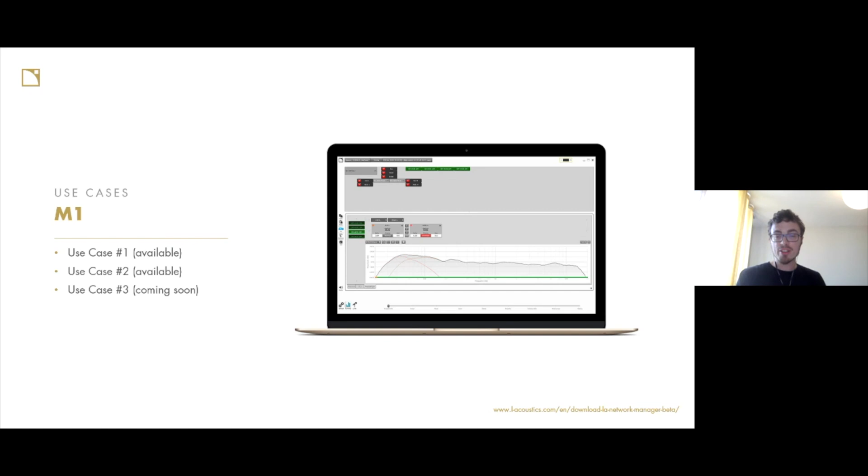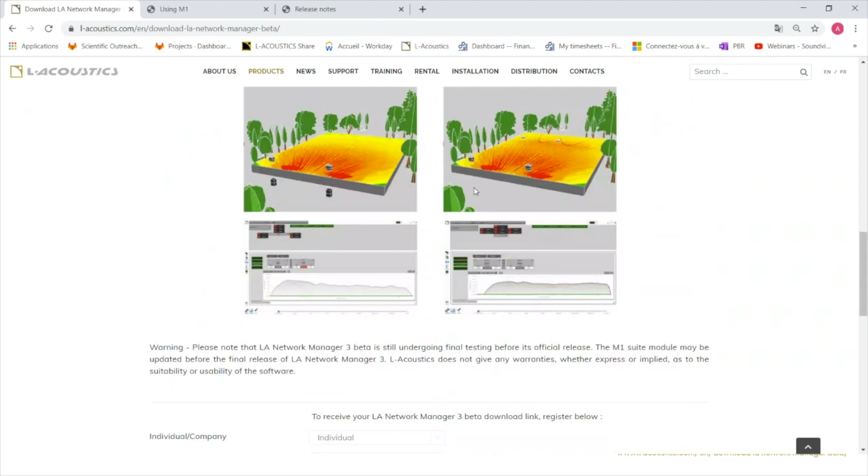Right now, normally you have access to the beta version that you can easily download on our website. Just going on Products, Software, and clicking here on Network Manager, you have a short presentation of the M1 suite with use cases 1 and 2 available in the package for Windows and for Mac also. You just have to register here, and you should receive a download link with Network Manager 3.0. This beta version uses firmware 2.9, like the official 2.7. It just includes the M1 suite, I mean M1 in the tuning page and RTA in the live page.

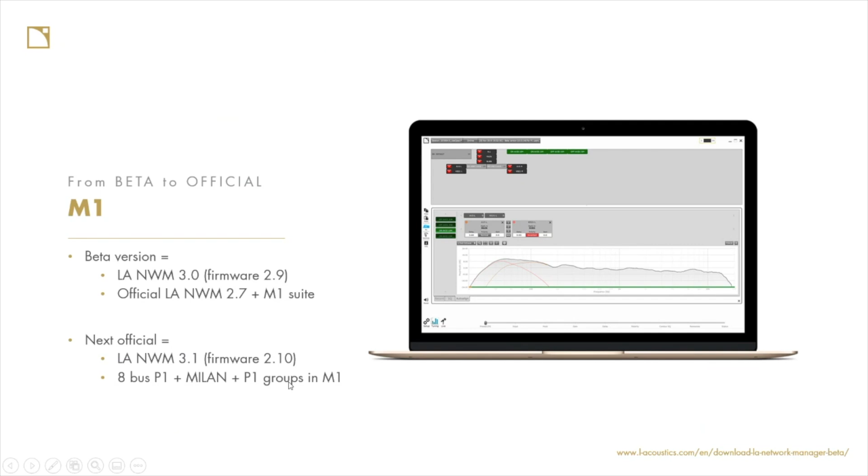Coming soon, the next official release will be LA Network Manager 3.1, including firmware 2.10, with a lot of new features, including in particular 8 buses for the P1 instead of 4 currently, with the new Milan specification inside, especially with AVB redundancy, and with a new feature regarding M1, which is related to P1 group management.

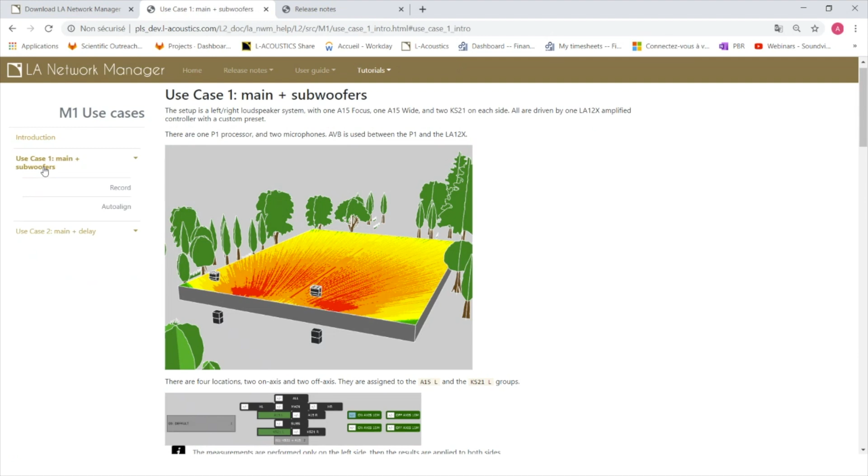So as I've shown you, you can already download the beta version. You can, of course, use the embedded help, where you can find here on the M1 use cases the description of each use case, with the presentation of the setup. For instance, this first use case 1 is main and sub using KS21 and A15.

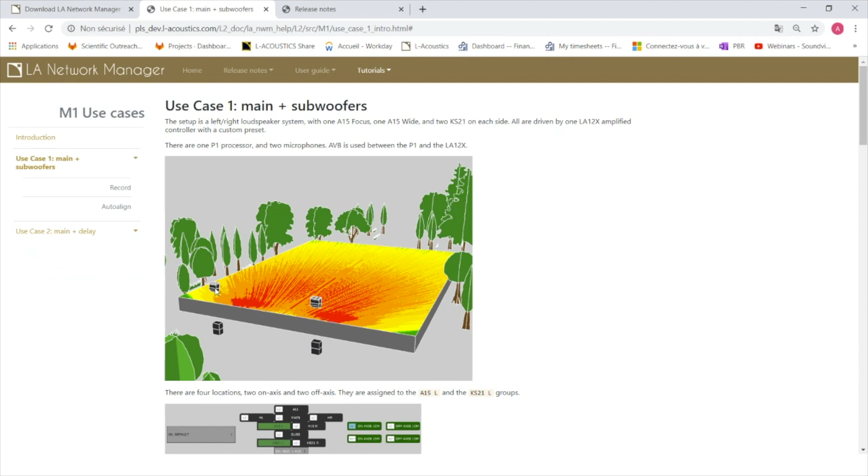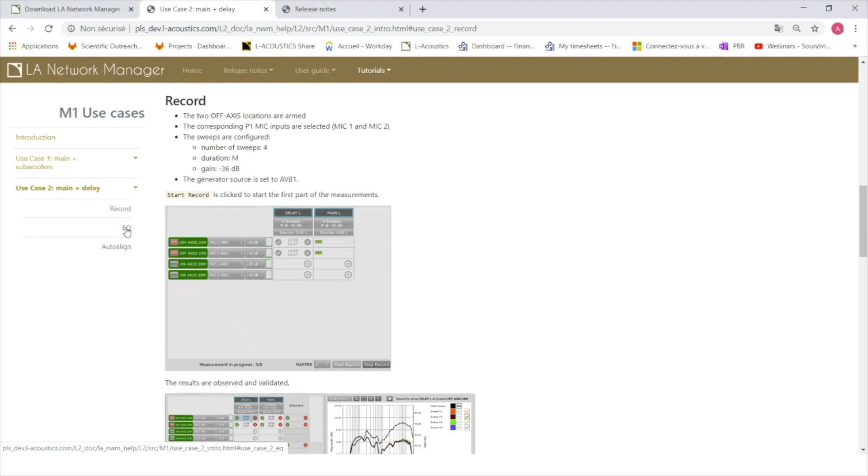It's introducing how the measurement included in this use case was recorded and how to use auto align. Same with the second use case related to the tuning of an A15 main and A15 delay, how the measurement was recorded, how to use EQ and auto align.

You can, of course, if you need, and you will probably need in the tuning page, access the embedded help regarding M1 workflow: how to set up, how to record, EQ, auto align, and last but not least, recommendations about the starting point of the measurement setup and how to review measurement and improve its quality if needed.

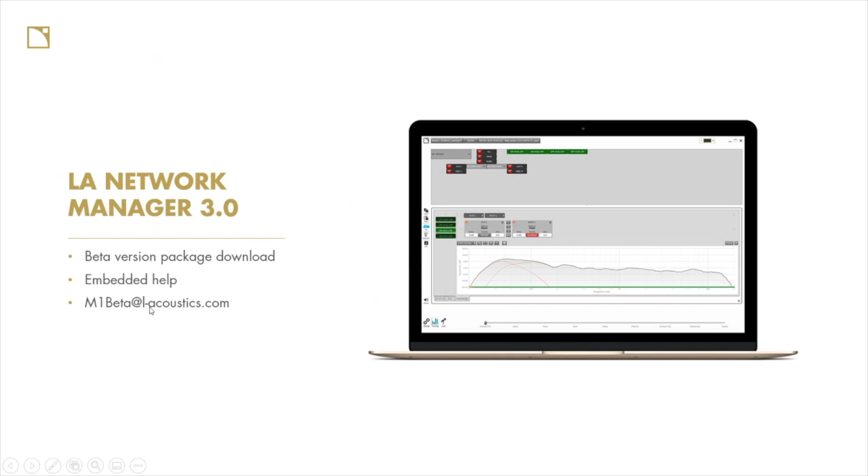So I think we are ready for the demo of the new 3.1 Network Manager version. To do this, I will first start with a simple setup with only one P1.

As I told you, the new feature in this 3.1 session version is that we can directly measure P1 groups, for instance to measure P series, or just to measure third party in combination with an L-Acoustics system. So you just have to create a group. Let's call it bus guest.

I can assign it directly to the 8 P1 buses. Let's say that I want to use bus 1 and 2 for AVB driving my main and sub, for instance, and I would like to use a bus dedicated for my P series. So I can just assign this group to bus 3, for instance.

So bus 3 for analog output directly feeding my fills, and bus 1 and 2 for AVB for my main and sub. As Scott showed you yesterday, you can add a location to measure a group, and now with this new version of Network Manager, you can assign directly a group, a P1 group.

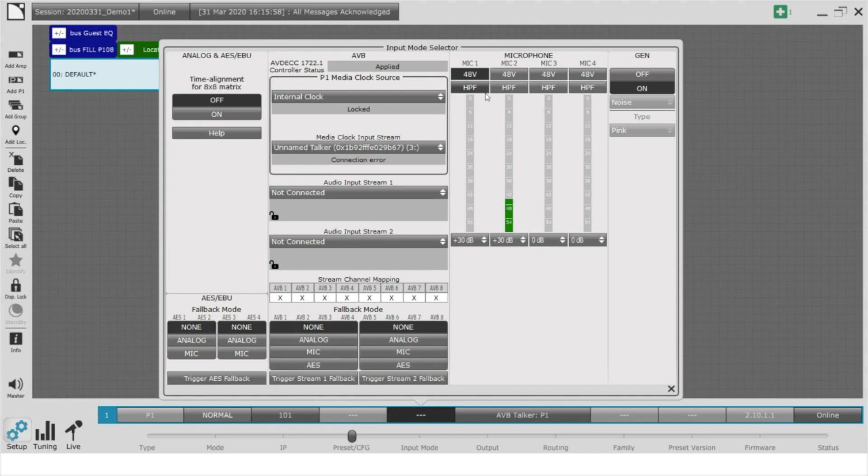That means now I am ready for a measurement. Just checking that I already have my mic ready for the preamp gain. I will just use one mic, with preamp gain and 48 volt power supply on.

And normally I can go into tuning and open MI. I will directly arrive on the record tab. Of course, I cannot go into EQ or auto align because I have not yet performed any measurement. So to do that, I will just have to set my sweep settings.

By default, you have 4 sweeps with M duration, medium duration, and a sweep gain at minus 48 dB, which is a safety approach, of course. But I advise you to check our recommendations regarding sweep settings and measurement quality and how to get it. There will be some white papers on it coming soon, and especially a webinar on Friday with Etienne and his team about how to get good quality measurements.

So for the moment, I will just leave it like this, and I have to route my generator. For this field bus, I just have to assign my generator on bus 3. Here you have a message saying there's no group armed, so I just have to arm my location, and now I'm ready.

On location 1, I will use mic one, and you get direct access to the preamp gain if you need to change it with the VU meter. Beware that the VU meter is pre-mute, so before starting recording, you have to unmute your mic. So normally we are ready to start.

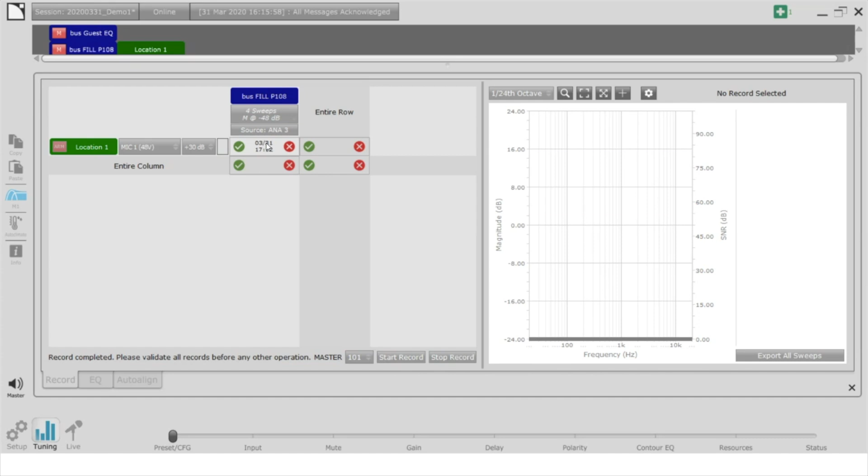Okay, once the measurement sequence is complete, by clicking on the measurement you have access to the SNR, whose Y scale is on the right side, SNR in dB, between 0 and 100 dB. You can see here that we are very good, around 50 dB of SNR, with a quality bar which is green, meaning it's a good, valid measurement.

And you have access here to the magnitude of the sweep. You can easily check the magnitude of the 4 sweeps here, which are almost in the same line, the same black line. The black line represents the computed sweep, which will be used for the rest of the tuning.

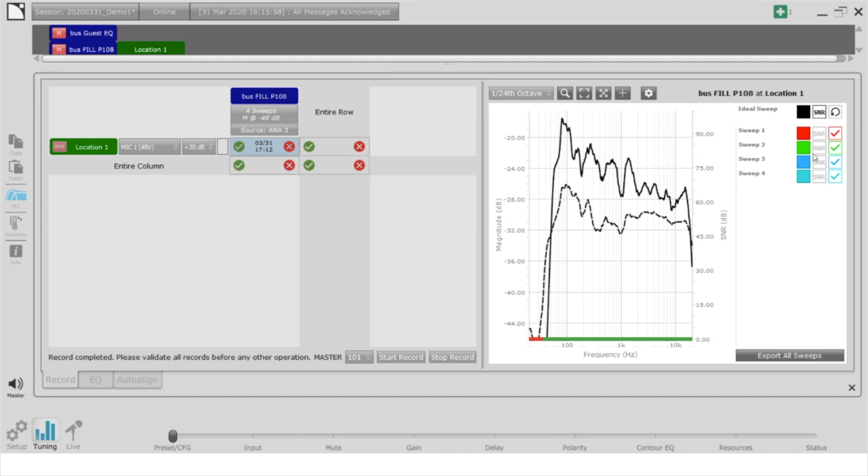And here you can unselect, if needed, one or several measurements. Actually, we have a clever algorithm managing this multi-sweep, which can easily detect SNR too low and discard sweeps with too low SNR, or sweeps with too much disparity regarding the spread of the sweep. So here my 4 sweeps are correct. I can accept it, and if needed, I can check my measurement further.

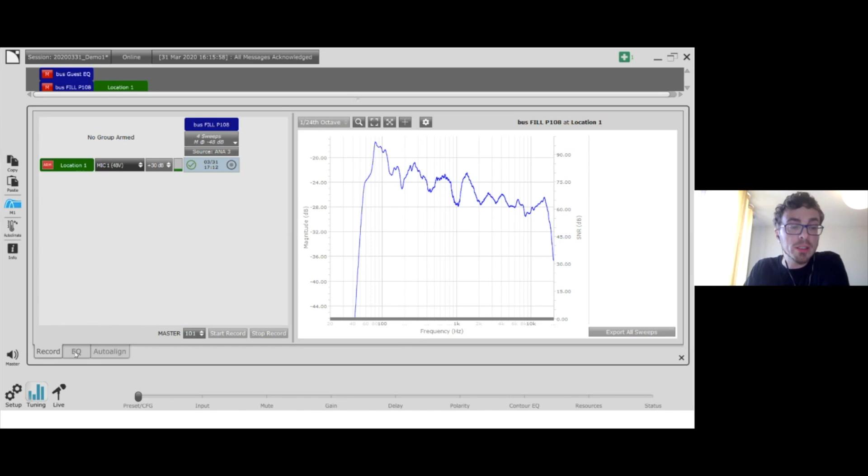As it's now recorded, I will have access to this measurement in the EQ tab, and I will have access to the gain, delay, and EQ of my P1 measurement group, and also to its parent groups, the grandfather groups, bus guest EQ.

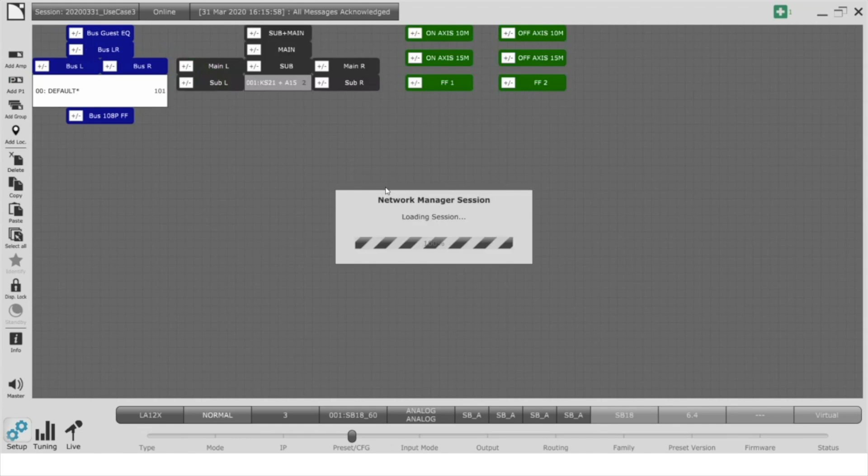As you can see, it's quite easy to measure P1 groups the same way as measuring the amp groups, as shown by Scott yesterday. I will directly go onto the new use case 3, including P1 group and amp group measurement.

Let me get rid of this. So in this use case, a quite simple and traditional system: sub and main, left and right system. I have sub left, sub right, main left, main right. I have double checked the assignment of the parent group sub and the parent group main, including left and right side, and I have a grandfather group sub and main.

This left and right system is driven with AVB through bus 1 and 2, bus left and right, whose parent group is bus left right. I also have a front fill driven by bus 3 with my bus 108P front fill, and the same bus guest EQ, including all the groups and measurement groups of the P1.

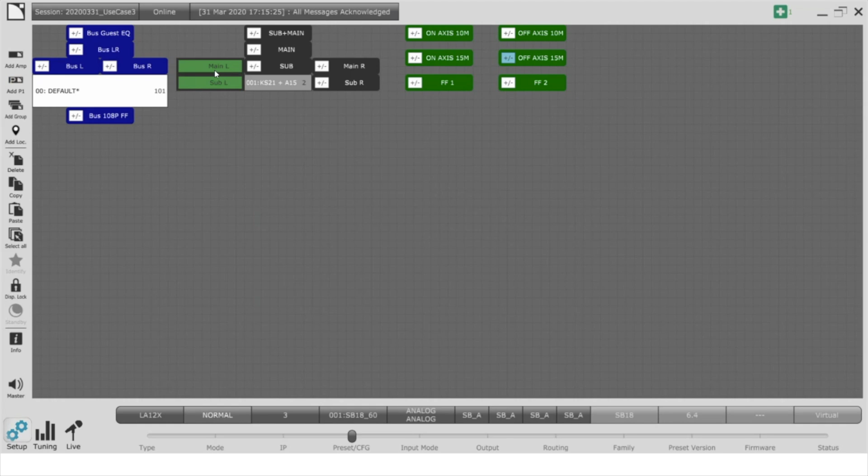As you can see, I already have 6 locations: 2 on axis and 2 off axis to measure main and subs, and 2 front fill dedicated to measure sub, main, and front fill. That means I will use these 4 locations to tune sub and main together, and then once sub and main are time-aligned and EQ is well tuned, I will use these 2 locations to tune front fill with my reference source sub and main.

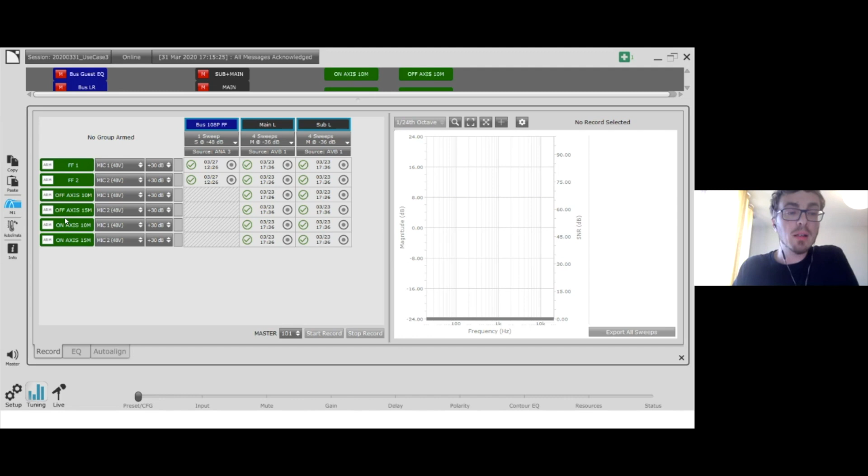So as I explained, this use case already includes all the measurements. That means for the 3 groups, I have measurement on the 6 locations. You can just check that measurements are already present here.

So we can directly go into EQ. In EQ you will find the same organization: the 3 measurement groups here, sub, main, and front fill bus, and the 6 locations. So I have measured sub and main on the 6 locations, and front fill on front fill 1 and 2.

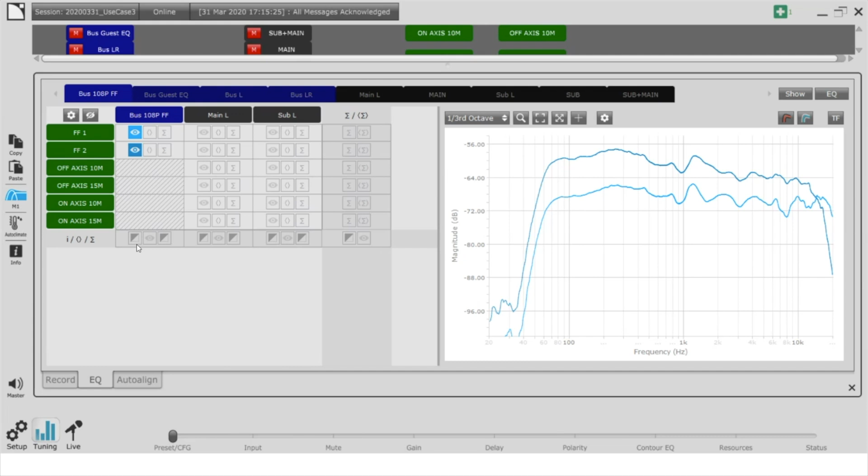I can, of course, display first, for instance, all my main individual measurements, the 6 measurements at once, or just one by one, and of course the average. The same for the sub - I can display all the individual measurements or display the average.

And if I want to display the current summation of it, I can just click here and here. I can maybe zoom on it a little bit.

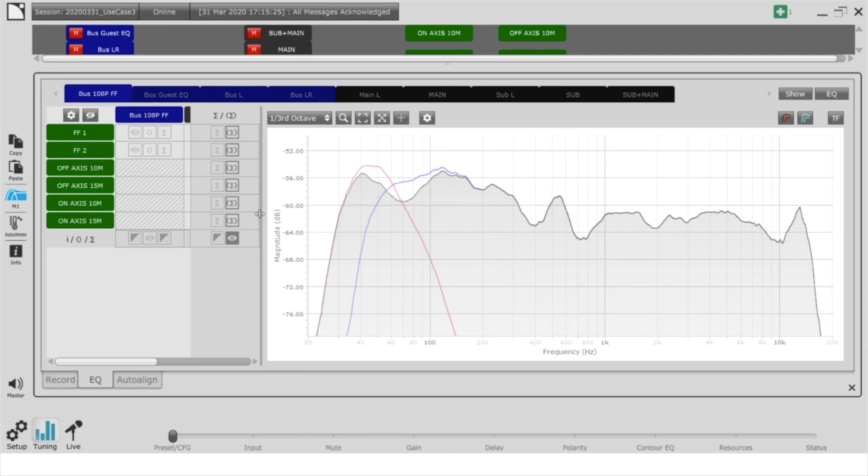I usually choose third octave band to choose the good contour target. I try to align here. I can maybe just adjust here if it's needed or not - oh, sorry for that. Okay, let's say it's good enough.

So as you can see right now, my sub and main are not really in phase. So before making any EQ, let's just go to the auto align tools.

In auto align, you will also find the 6 locations. And for each location, you will see that for the off axis and on axis, you have measurement group sub and main left, and for the front fill, sub, main, and front fill bus.

So let's say I would like to first align sub and main. I will just have to click on it, choose the target group - the group on which gain, delay, and polarity will be applied. So as I have a left-right system, I measure left, but I will apply the delay and the time alignment strategy on the parent group sub. And for the main left, I will choose the main parent group.

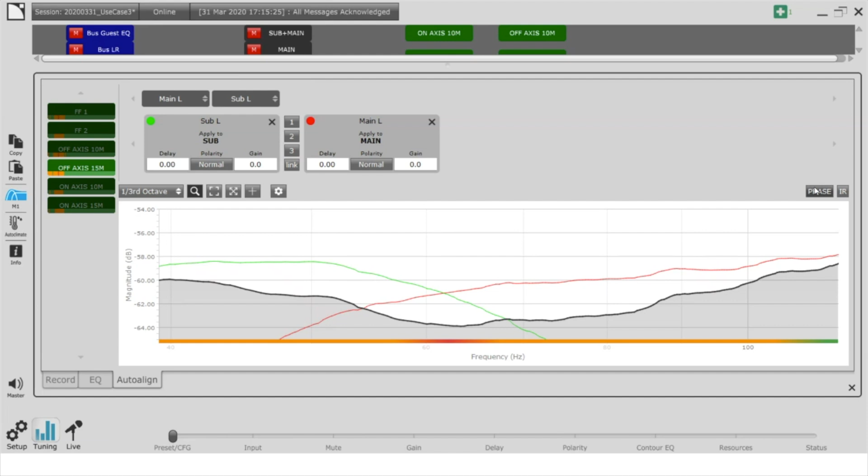So maybe I can choose this one. I can zoom on it in the crossover, and I can also check the phase just by clicking here. So you can see that through the phase, we are completely opposite phase between the two sources currently.

So let's just try to click on the first button, which is option 1 of our algorithm delay finder. So what happened with this solution? It has proposed around 1 millisecond on the main with a reverse polarity on the main. And you can see that it's quite good summation in the crossover, and the phase is correct.

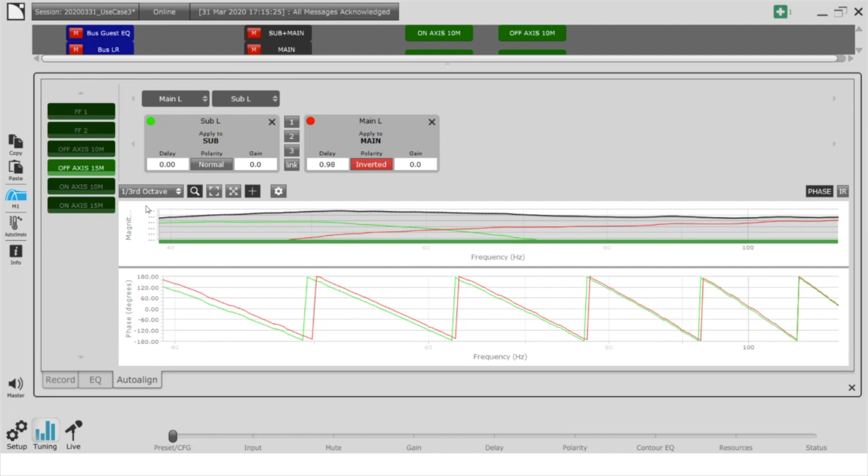I can maybe try other solutions. Option 2 will be a proposal with a good summation, very good summation around 54, 55 Hertz. And option 3 will have a good summation around 75 Hertz. So I think for this location, I will choose option 1 to get a good summation, a good in-phase signal on a broadband. And as you can see, the quality bar of all locations is green.

So of course I can do the same on different locations. You see, most of the time we have around 1 or 2 milliseconds delay on the main, with reverse polarity on the main. So of course I like reverse polarity on the sub, so I can just link both sources to keep the same strategy, time alignment, and click on reverse polarity on the sub.

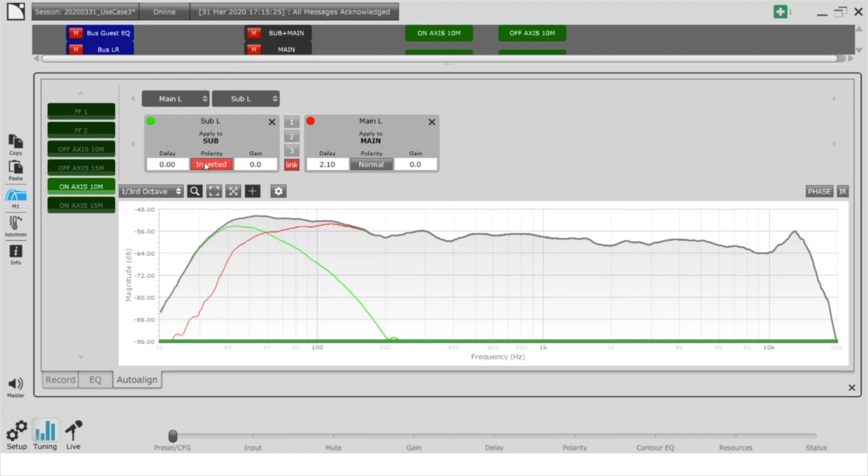So let's check in the EQ tab. Now we have a good summation on the average. So that's quite a good point. But maybe, of course, I will listen to it and I can fine tune it by listening, and maybe I can play with the delay. So maybe 1 millisecond. Maybe I can zoom on it.

Okay, with 2 milliseconds, I have more infra but less impact. So you see that the lower the delay on the main, the more impact and less infra. And if I put 3 milliseconds, I will have more low end, but I will lose maybe impact.

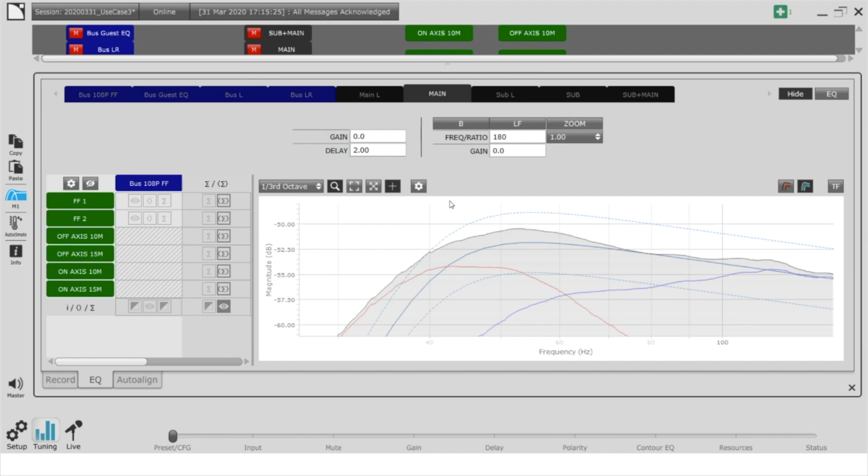So of course, you can unmute the source and play with M1 to listen to the system at the same time while checking your measurement and fine-tuning delay, gains, and polarity. So let's put 2 milliseconds.

Now I can consider that my main and my subs are time aligned, so I would like to perform some EQ. Of course, I could do EQ on main or sub separately, but I will prefer to EQ sub and main, sub plus main group, directly.

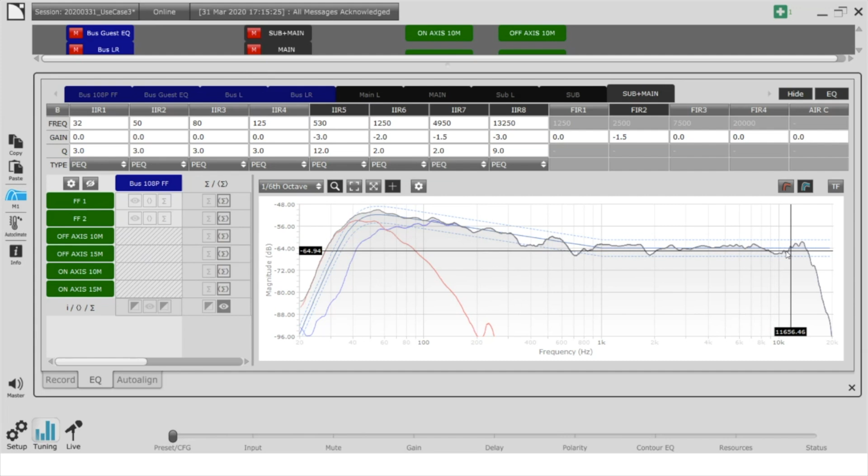So to do that, I can easily change the smoothing. I'm working on the curve with the cursor and apply some filters. As I'm a lazy guy, I have already prepared some EQ, trying to match the average with the contour. And of course, I can check the transfer function of the EQ, and I can bypass the EQ just to check the impact on the measurement while listening to the system.

So let's say that this EQ and time alignment is good enough for me. So the next step will be to time align sub main with my front fill. So I'm just displaying here the average of my two signals, two responses of bus front fill on these two locations.

Of course, I will just go on the specific bus dealing with my front fill, this one. I can have access here to the gain and delay. Maybe I can put, let's say, maybe more, actually 0 dB is okay, maybe. I can, of course, play with EQ on it.

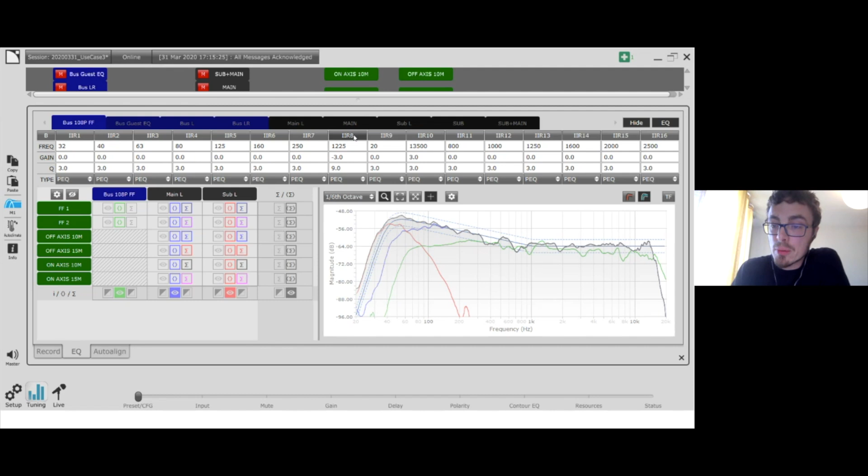Here I have, okay, it's working. Oh, maybe here, some points on it. I can bypass and check if it's working.

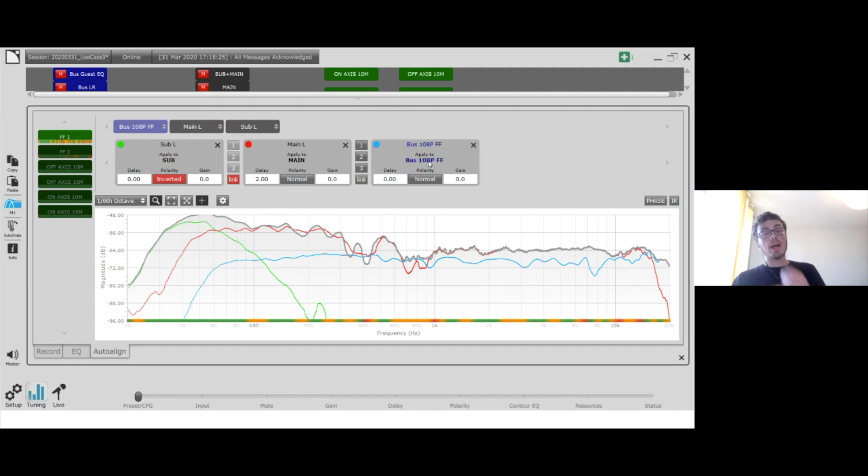And finally, I will want maybe to time align my front fill with my sub and main. So I just keep sub and main linked, and I can add my bus front fill with the bus front fill as target group. And as you can see, the summation is not really correct.

So I can use, of course, a delay finder 1, 2, or 3, while maybe monitoring the impulse response of my main in red and my front fill in blue. So let's try to play with delay finder. So here it will propose 12 milliseconds, but not so good summation and reverse polarity.

So maybe I can play with other options. This one seems better as I check on my response, impulse response. And I can play on the other location front fill 2.

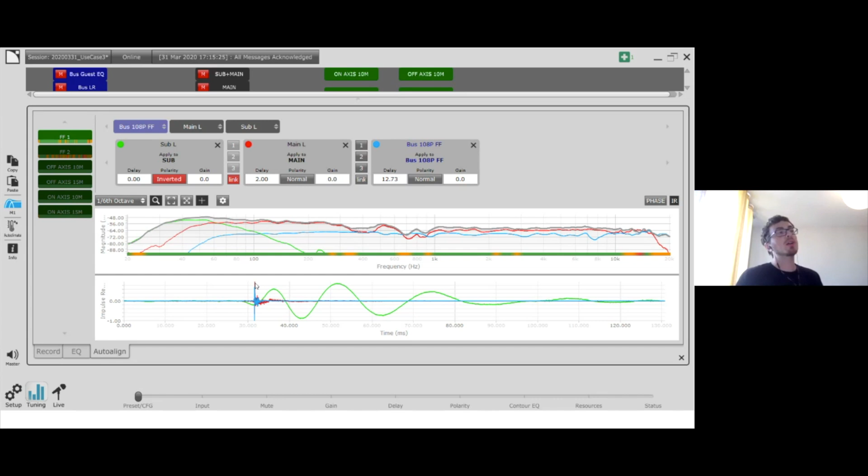No, it just proposed 0 milliseconds. Already time aligned, that's perfect. Of course, as you can see, for the full range, you cannot have a green quality bar everywhere. So we usually advise for the front fills, for the fills alignment, to use delay mode in Soundvision.

But nevertheless, I can also check the contribution of my front fill. Sorry, I will just check the contribution of my front fill. So as you can see, the summation with the sub and main seems quite correct. And of course, it's also recommended to listen to it, to trust your ears first.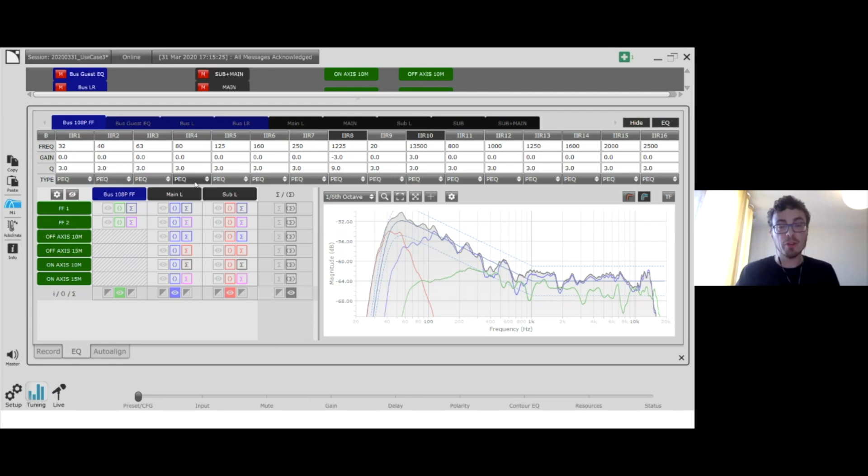So that is the use case number 3, which will be available quite soon. When I say quite soon, we hope at best to release this official 3.1 version of LA Network Manager at best next week, but it has to be confirmed. Okay, thank you for your attention. Maybe you have some questions regarding these use cases.

Yeah, Alex, that was really great. Obviously, there were quite a lot of comments and questions about P1 having 8 buses, so that was a nice little surprise for everybody. I know there's a lot of people excited about that.

I had one. You were saying in the beginning, you can use M1 and listen to it at the same time. How do we interact with, say, the mute status in M1 while we're actually looking at the measurements? Can you show how that's actually done? Of course, you can just quit M1. You can just unmute some source. Actually, I don't have the system right here, but you can, of course, use it and just play within M1 and just go back to the source you want to listen to.

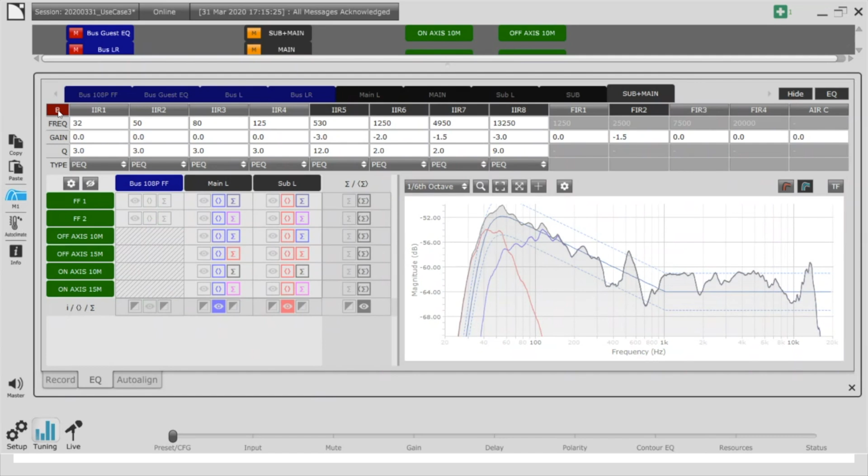So maybe I could first unmute sub left and main left and go in M1 and just display sub and main, and maybe on sub and main try to bypass the EQ and listen to it, just to check with measurement while the system is on mute, to have a clear idea of the time alignment and the EQ. I can play like this, quite simple. I hope it answered the question.

Cool. And then you were saying something, and I think this is a really challenging thing for everyone to understand until you really start to use M1. Someone was asking, how do you know if your settings are set? Where do you copy or paste, how do we know that it's there? It's just a very different feeling for anyone who's ever done calibration using two different software platforms before. Is this something you have to set or turn on or turn off, or is it just ready to go?

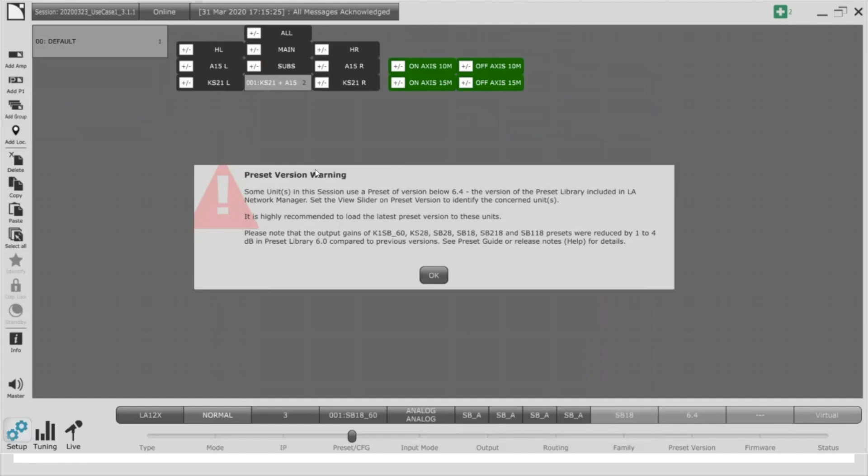Normally, if you have clearly prepared your calibration, maybe I can take another example with use case 1, which is already available on the website with the beta phase. If you have clearly identified the group and the amp channel assignment, as you do already with LA Network Manager official, and you have properly checked the parent group, all the groups, and the assignment between location and the group you want to measure, normally you have no problem to go into M1 and record.

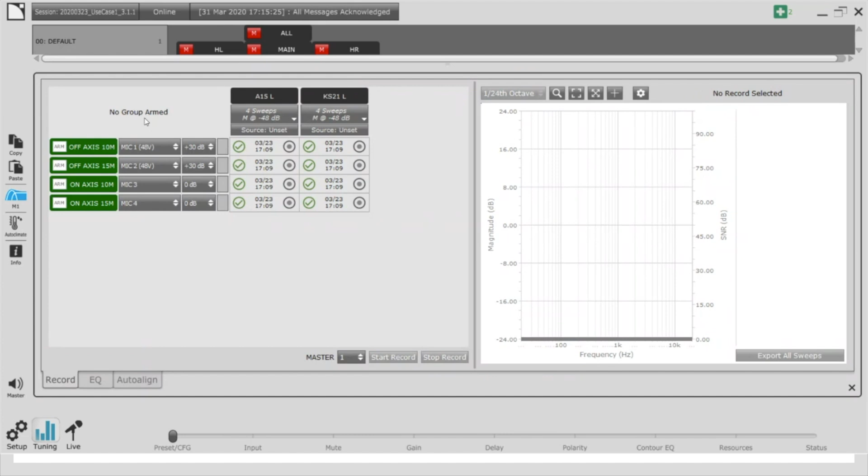Actually, if you have any problem, normally you will have some warning, like here I forgot to arm, here I forgot to put the routing on it. So normally, if everything is okay, you should have no problem for the routing. Here I cannot because there is no P1 online, and that's why we supply to you some use cases with measurement.

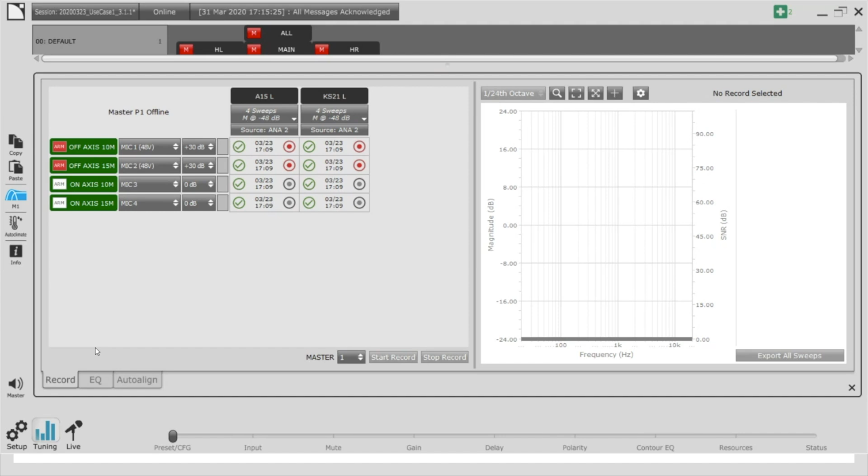But normally, as soon as you apply gain, delay, and array morphing, EQ, you will see it on the measurement, and it will directly be applied on the group, on the P1 group, and of course on the amp. So you will directly listen to it. So for instance, I have put main minus 3 dB. Of course, it will directly be applied on the P1 group, on the group, and of course on the amp.

So what you're saying is any setting or change in M1 is instantly modified in the amplifier. So in fact, what you're seeing in M1 is a representation of the current status of the system at all times, correct?

Yeah, correct, exactly. Oh, cool.

So once again, for anyone who's never used M1 yet, if you're just downloading the files that we have on the website, it takes a lot to get used to this, but you have normally two pieces of software, the measurement software and the amplifier DSP software, and you always have to manually copy all your settings back and forth. And what M1 actually allows you to do is instantaneously merge those and know that if you change something in the DSP, you'll see that reflected in your measurement. And if you change something in the measurement, you'll see that reflected in the DSP.

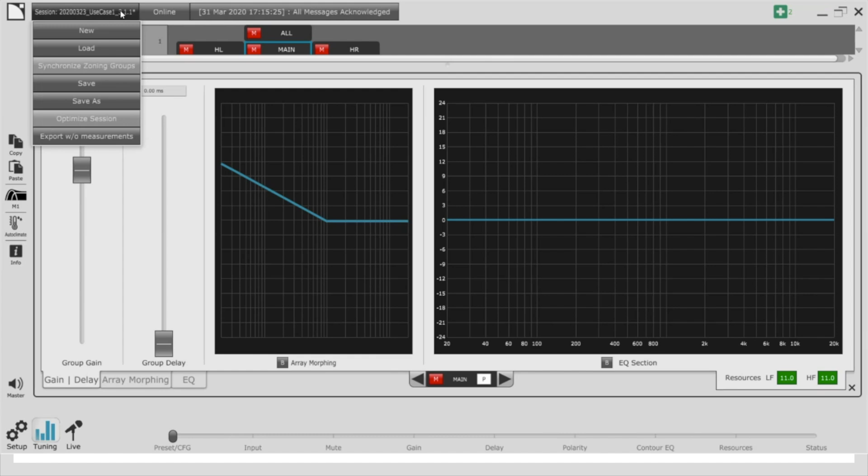So Alex, I think you can even show this if you wanted. If you were on during the show, for instance, we're mixing the show, and the front of house engineer says there's too much 250 hertz in the system. If you took an EQ out at 250 on the all group, for example, or on your P1 bus, that would reflect. Yeah, maybe on the P1. Yeah, if you want to change, I think for this example we can take the use case 3, because we have a hybrid system. I mean amps and P1 groups with P series and sub and main.

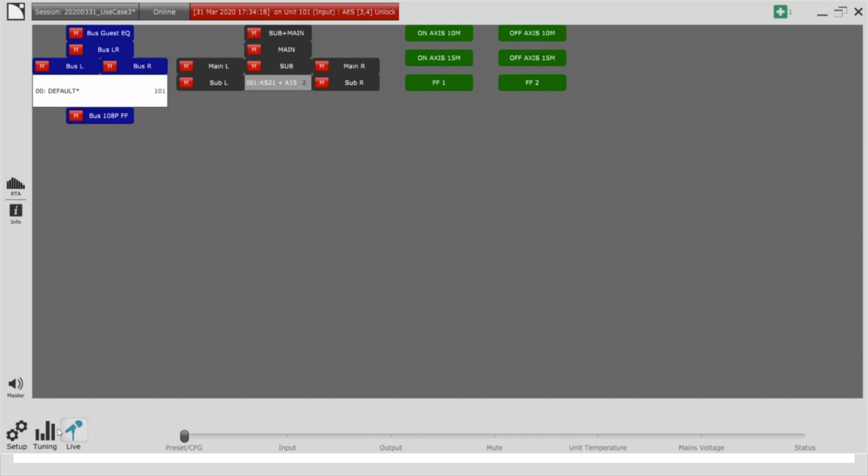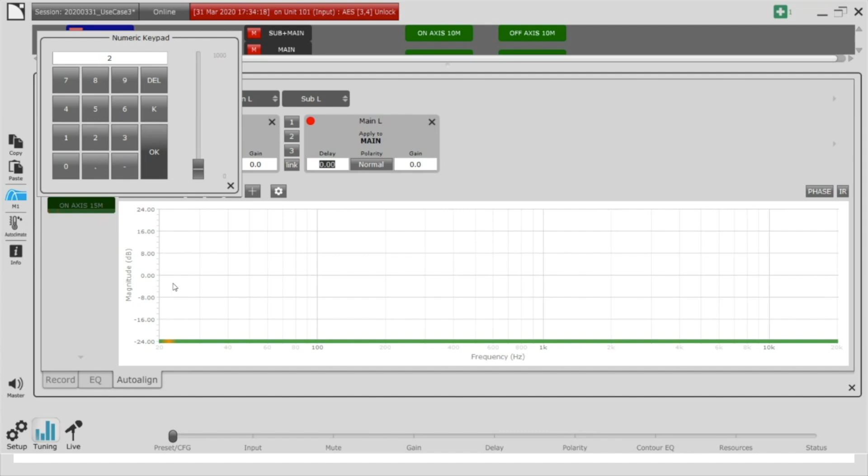That's why if you need, even if you are live, you can quickly return to the tuning. Of course, normally you will keep all the display. Sorry, I haven't saved, so I will just quickly set it up. That was reverse polarity and 2 milliseconds on the main. Here I have a good summation. Let's say the front fill is already time aligned.

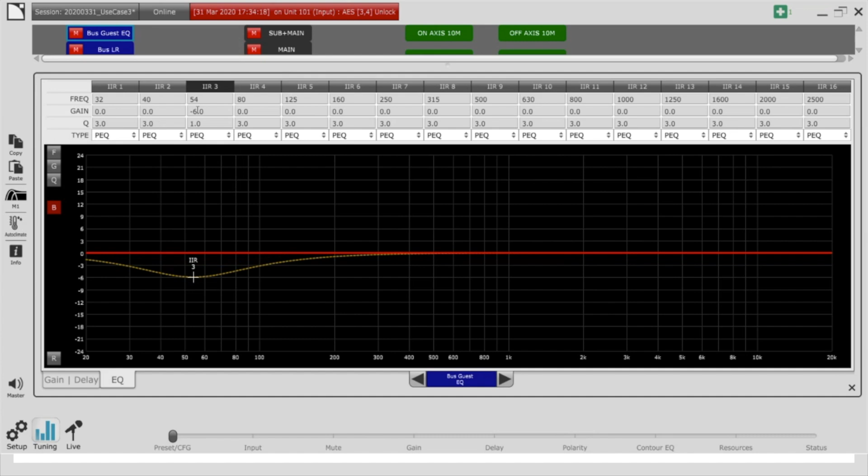And this would be true whether you change that value in M1 or in the Network Manager workspace, right? So if in the middle of the show, the engineer says, hey, Alex, can you please turn down 54 hertz? It's just killing me. And you make that change here in the Network Manager playground. If you go back to your M1, you'll actually see the measurement updated. So in the middle of the show, you can actually take a look at the response modification based on the EQ change. Bypass. Yeah, of course. That's really great. That's really neat. I like that a lot.

So I noticed something else that you seem to customize, and I've had a few people ask this question. Obviously, in the EQ page especially, we show a lot of different measurements. Is there a way you can custom color things to your personal preference? Can you modify the colors or size of lines at all? Yeah, of course, we have the measurement viewer settings. I have a lot of measurements here. For instance, I have red and blue for the main. And if I need, I can change it to other colors directly with these measurement viewer settings.

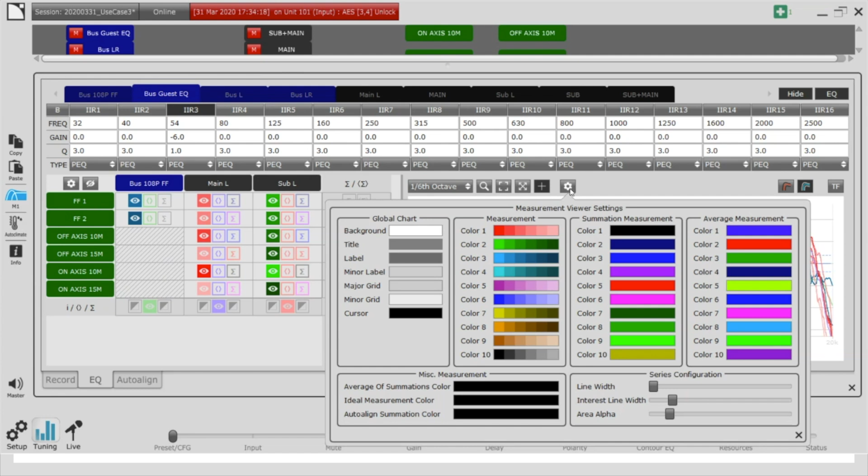That's great. It should be saved with your user settings for the next session. Great. So if I'm on tour, for example, I might have a very common system every single day that's the same, 12 a side K2, and I'm going to measure the system at the same 6 to 8 locations. Yeah, you will keep your viewer settings, of course.

You are talking about touring, maybe an interesting functionality here on the maintenance button. You can also import and export measurements. I mean, if one day during the tour you have a good reference you want to keep, you can export it and then re-import it to another session for the day after, for instance. So it can be quite useful to use reference curves like this.

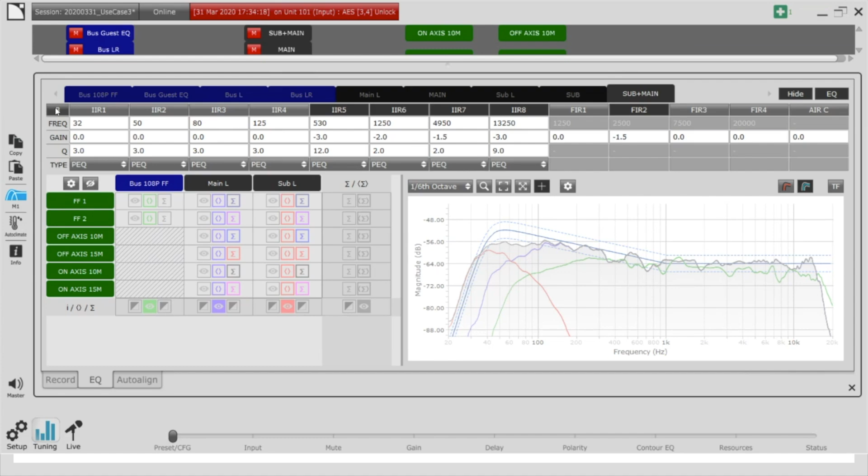Sergey or Marcus or Julian, I don't know if you guys have any good questions to send over our way. I haven't seen a whole lot of other things come through that I think we should try to tackle at this moment. Sergey, how are you doing in London? Is everything good over there?

I'm good, thank you. I'm dealing with the Q&A part of it still, and yeah, excellent. I think we're fine here. Excellent. Julian, how's everything in Paris? Still good in your luxurious high-rise? Was it a 5,000 square meter apartment? Yeah, very good. As you can see, it's a whole... there might be a huge reverberation time.

No, I did see on the questions there are many questions related to the use of EQ and alignment, and what is actually the goal of calibration, if it's just to make a frequency response flat. It's a little bit more subtle than that, but roughly, for the calibration we're taking measurements at a lot of different locations at the same time, and we average all those measurements. The game is not to make a curve flat, but to find discrepancies and to smooth them and adjust that.